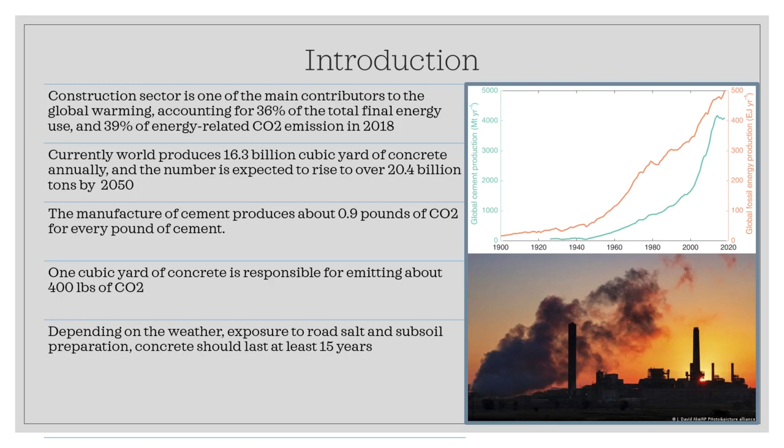Depending on the weather, exposure to road salt, and subsoil preparation, concrete should last at least 15 years. But of course, that can go up to 30 years if the concrete is properly designed.

Around 1 billion used tires are disposed of each year in the world. Only about 100 million tires are recycled. Since tire incinerating can lead to dangerous fires, spills, and air pollution, reusing tires as tire rubber particles and fibers can reduce air pollution and the amount of municipal solid waste released into the landfill. The sample weighted average carbon emission for recycling scrap tires is 124 kilogram CO2 equivalent per ton sold.

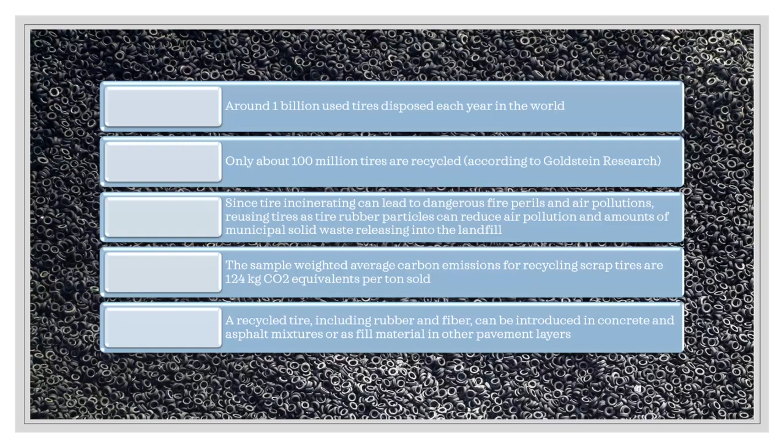A recycled tire, including rubber and fibers, can be introduced into concrete and asphalt mixtures or used as fill material in other pavement layers. In the 1950s, the concept of composite materials came into being, and fiber reinforced concrete was one of the topics of interest.

Once the health risks associated with asbestos were discovered, there was a need to find a replacement substance in concrete and other building materials. By the 1960s, steel, glass, and synthetic fibers were used in concrete. But research into new fiber reinforced concrete continues today.

Fibers are usually used in concrete to control cracking due to plastic shrinkage and drying shrinkage. They also reduce the permeability of concrete and thus reduce bleeding of water. Some types of fibers produce greater impact, abrasion, and shatter resistance in concrete. And larger steel or synthetic fibers can replace rebar or steel completely in certain situations.

Fiber reinforced concrete has all but completely replaced rebar in underground construction industries such as tunnel segments, where almost all tunnel linings are fiber reinforced in lieu of using rebar.

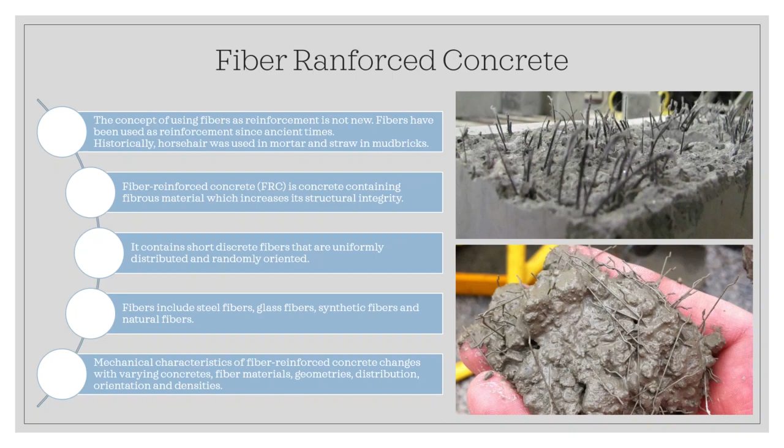Indeed, some fiber actually reduces the compressive strength of concrete. But of course, there are more benefits in other mechanical characteristics of the reinforced concrete materials.

The amount of fiber added to the concrete mix is expressed as a percentage of the total volume of the composite, termed volume fraction, or VF (V sub F), typically ranging from 0.1 to 3%. The aspect ratio, L over D, or length over diameter of the fibers, is calculated by dividing fiber length by its diameter.

Fibers with a non-circular cross-section use an equivalent diameter for the calculation of aspect ratio. If the fiber's modulus of elasticity is higher than the matrix, or concrete, or mortar binder, they help to carry the load by increasing the tensile strength of the material.

Increasing the aspect ratio of a fiber usually augments the flexural strength and toughness of the matrix. Longer length results in better matrix bonding inside the concrete, and finer diameter increases the count of the fibers.

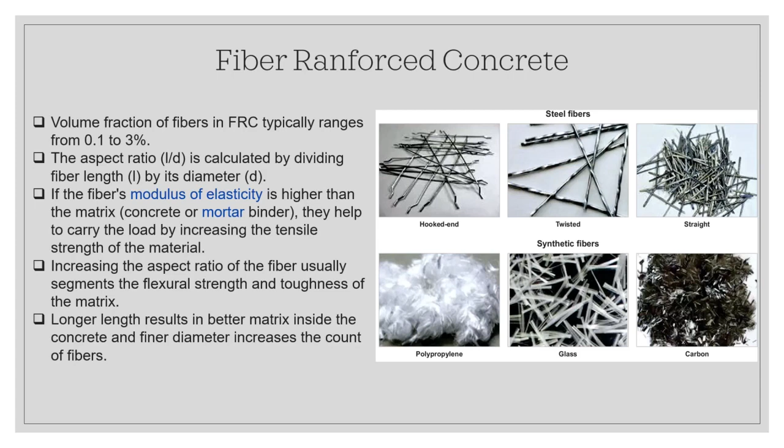One of the main applications of fiber reinforced concrete is pavement. As you know, we have two different types of pavement, flexible and rigid pavement. In flexible pavement, we usually use asphalt material, and in rigid pavement, we use concrete material.

The essential difference between the two types of pavement, flexible and rigid, is the manner in which they distribute the load over the subgrade. Rigid pavement, because of concrete's rigidity and stiffness, tends to distribute the load over a relatively wide area of subgrade. The concrete slab itself supplies a major portion of the rigid pavement's structural capacity. Flexible pavement, inherently built with weaker and less stiff material, does not spread load as well as concrete.

Flexible pavement usually requires more layers and greater thickness for optimally transmitting load to the subgrade. The major factor considered in the design of rigid pavement is the structural strength of the concrete, so minor variations in subgrade strength have little influence upon its structural capacity. The major factor in flexible pavement design is the combined strength of the layers.

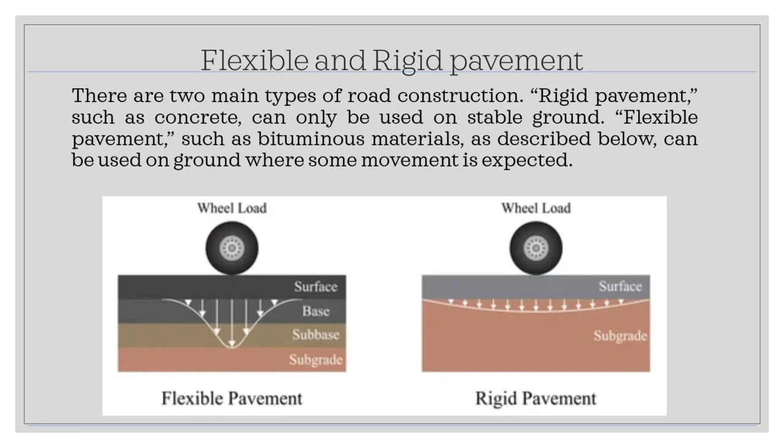Developing cracks in concrete pavement is one of the major problems that can cause defects and failures. There are many different types, including the plastic shrinkage crack: when concrete is still in its plastic state before hardening, it is full of water. When the water eventually leaves the slab, it leaves behind large voids between the solid particles. These empty spaces make the concrete weaker and more prone to cracking. This happens frequently and is referred to as plastic shrinkage cracking.

While plastic shrinkage cracks can happen anywhere in a slab, wall, or other concrete structure, they almost always happen at reentrant corners or around a circular object in the middle of a slab. So wherever you have utilities, pipes, or drainage, it's more prone to cracking there. Since the concrete cannot shrink around the corner, stress will cause the concrete to crack from that point. The other type of crack is the expansion crack.

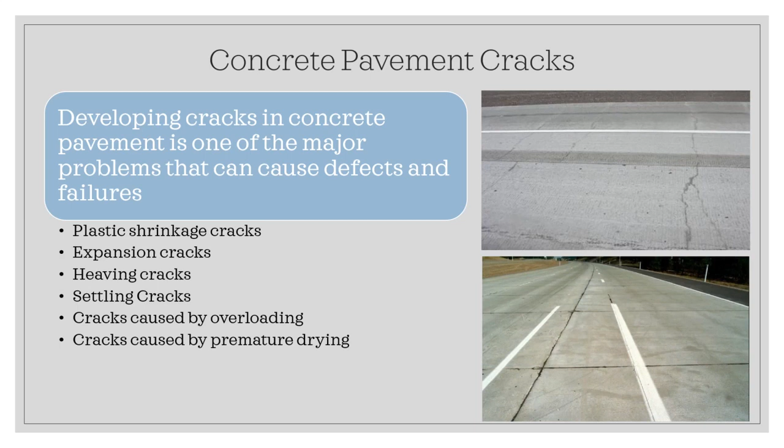Now let's talk about recycled steel fiber. In recent years, several research studies have explored the potential of end-of-life tire byproducts in the construction industry. The reuse and rational disposal of ELT is a high priority goal of the tire business, since the increasing amount of this waste is a serious environmental and public health threat. The reuse of waste tires has become the most sustainable strategy to enable investment in ELT recycling.

Approximately 15 to 25% by weight of a tire is composed of metal, which is great—we can basically use this 15 to 25% in concrete as recycled steel fiber. Recycled steel fiber is currently derived from the tire recycling industry using mechanical and thermal degradation processes such as tire shredding, cryogenic reduction, and pyrolysis.

Use of recycled steel fiber may reduce CO2 emissions since recycling saves an impressive amount of energy, contributing to the reduction of the ecological footprint and promoting environmental sustainability. The reinforcement of cement-based material with discrete steel fiber is now a current practice for several applications such as industrial floors, tunnel lining, prefabricated elements, and hydraulic structures.

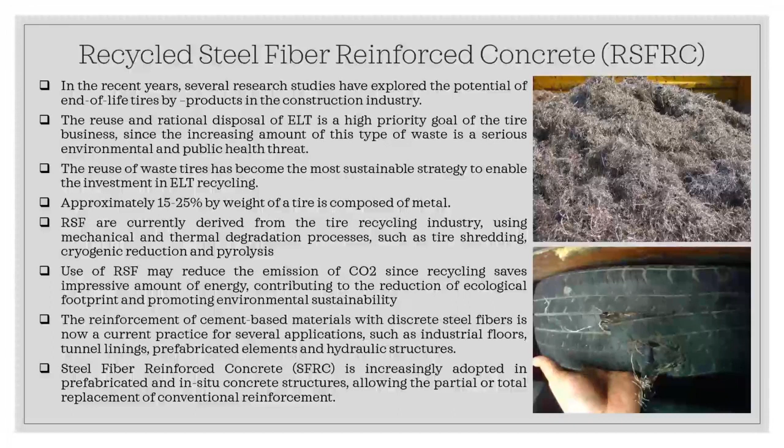Steel fiber reinforced concrete, or SFRC, is increasingly adopted in prefabricated and in-situ concrete structures, allowing the partial or total replacement of conventional reinforcement. The incorporation of industrial steel fibers, ISF, in reinforced concrete to improve the mechanical and durability performance of concrete structures has been investigated over the past three decades.

The crack opening restraint provided by the reinforcement mechanism of ISF bridging the cracks leads to a significant increase in post-cracking load bearing capacity and energy absorption performance, resulting in increased strength, ductility, and toughness. The stress redistribution provided by fiber reinforcement allows the ultimate load to be higher than the cracking load, which is notably significant for structures with a high degree of support redundancy.

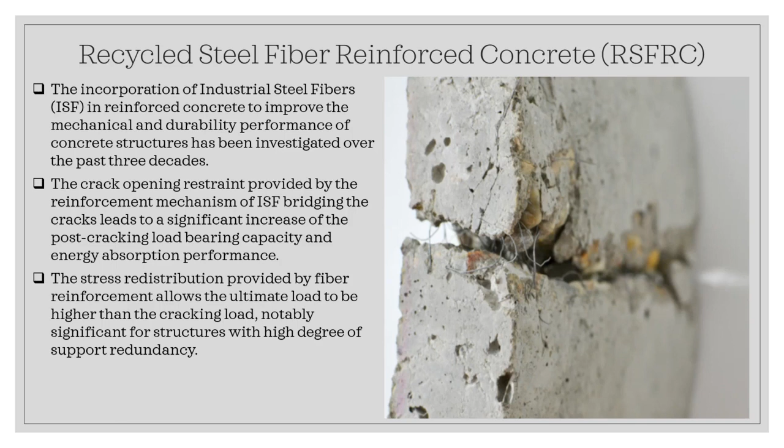Recent research demonstrates that RSF can be a viable alternative to commercially available ISF for use in steel fiber reinforced concrete without a significant decay in the relevant mechanical properties, provided that RSF present adequate geometric characteristics, which depends on the source, which is waste tire, and the recycling process.

In this process, basically, depending on the type of waste tire, the fibers or wires inside may have different grades of steel, and depending on the manufacturer, they may have different mechanical characteristics. In addition, the recycling process may change the property of the fibers, especially in terms of aspect ratio.

The results of experimental and numerical investigations aiming to characterize the tensile and bond behavior of RSF embedded in a cementitious matrix, as well as the compressive strength and flexural behavior of notched recycled steel fiber reinforced concrete beams, show that recycled steel fiber may be suitable for reinforcement of cementitious composites with enhanced ductility and toughness properties. In addition, the replacement of ISF by RSF in fiber reinforced concrete responds to the concept of circular economy, as it may impact the reduction of energy consumption and greenhouse gas emissions.

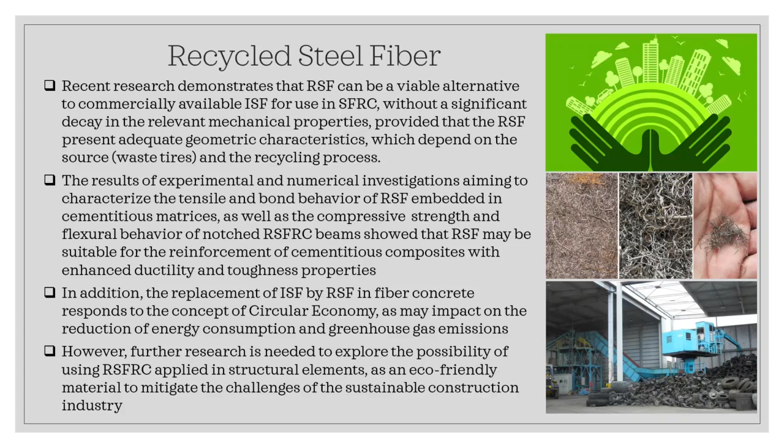Constitutive models describe the material responses to different mechanical conditions, which provides stress-strain relations to formulate the governing equations. As we all know, steel is an isotropic material that provides identical strength in compression and tension, of course, at the material level.

When you look at the stress-strain relation of concrete material, typically concrete is very strong in compression as compared to tension. According to ACI, the modulus of rupture, which can be considered as tensile strength, is considered as 7.5 lambda squared root of FC prime in US units.

Most of these empirical equations provided in standards consider the tensile strength as a function of compressive strength, meaning that by increasing the compressive strength, you can expect that the tensile strength is also increased.

But as I said, in concrete material, you cannot use concrete in tension without reinforcing it when you want to use it as a structural member. So either with a steel bar, composite materials, or even fibers, you need to reinforce the concrete wherever you have tension, either pure tension, which is very rare, or flexure, where part of the section is taken into tension.

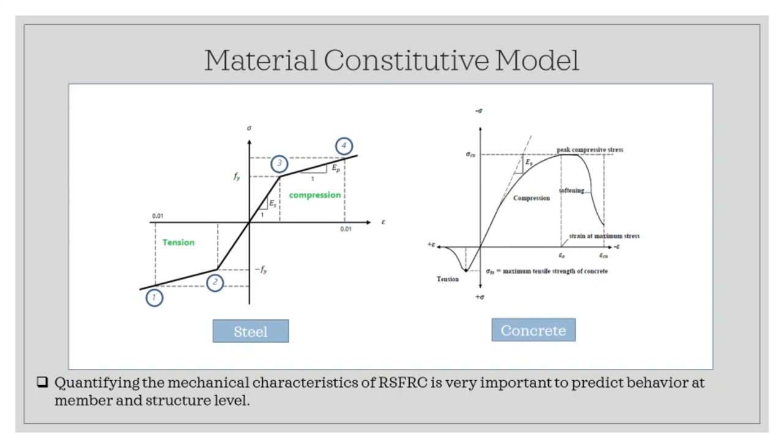When it comes to recycled steel fiber reinforced concrete, it is even more complicated. The reason is because in recycled steel fiber reinforced concrete, the shape of the fibers are not identical. We have different shapes and also different aspect ratios that we need to take into account when using finite element methods or computational simulation to analyze our structure or structural member.

One of the most recent research conducted on constitutive models for SFRC is the research conducted by Yang et al. in 2019, and they provided tensile strength, elastic modulus, Poisson ratio, and also the compressive strength of fiber reinforced concrete.

In this research, what they did was use a factor called RI, or reinforcement index. The reinforcement index in their research is simply defined as the multiplication of volume fraction by aspect ratio. So that basically means the fiber content multiplied by aspect ratio, which aspect ratio is the length of the fibers divided by diameter of the fibers.

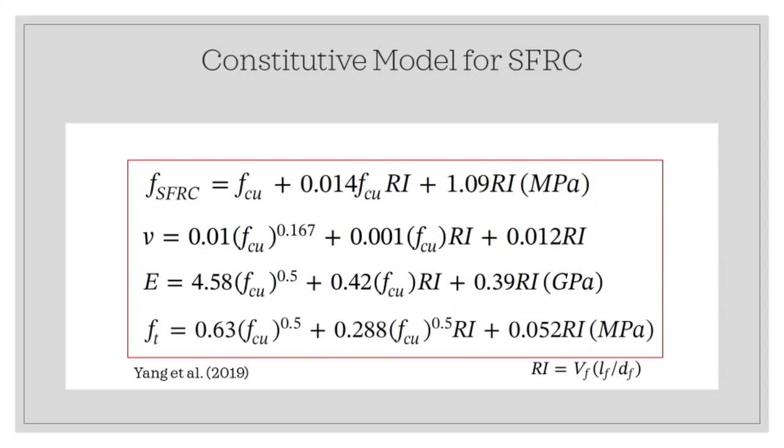So with two parameters, one is RI, the reinforcement index, and the other is FCU, which is the compressive strength of the concrete used in making that fiber reinforced concrete material, this concept can also be used in identifying the recycled steel fiber reinforced concrete mechanical properties and constitutive model. Their research was based on experimental and numerical results used to come up with this constitutive model. Geometric characteristic of fibers is a main difference between recycled steel fibers and industrial steel fibers.

A group of students from Morgan State University, from my research group, conducted research on recycled steel fibers extracted from tires. They visited a couple of recycling plants and collected some of the wires and steel fibers extracted from waste tires, brought those to the lab, randomly selected different batches from these different recycling plants, and then characterized the geometry of the fibers in terms of length and diameter, then determined aspect ratio, and also tried to see the frequency of these fibers within a batch.

This is important because, as shown in a previous slide, there is a relationship between the reinforcement index and the tensile strength, compressive strength, elastic modulus, and so on. So by increasing the reinforcement index, you can increase the strength in tension, compression, and so on, definitely enhancing the mechanical properties of the material.

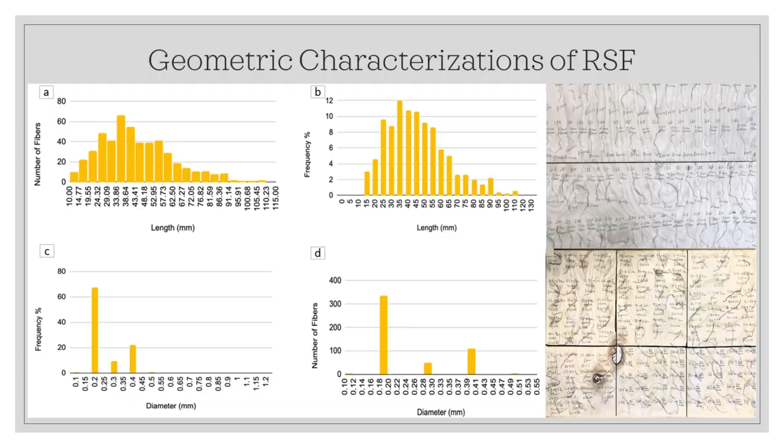Now let's talk about the computational modeling. An experimentally verified numerical model was used in this study to evaluate the performance of a flexural member made of fiber reinforced concrete, to conduct a parametric study evaluating the performance of recycled steel fiber reinforced concrete. ATENA was used in this research to conduct finite element analysis, a nonlinear crack analysis for concrete and fiber reinforced concrete for a flexural member.

ATENA belongs to a category of advanced analysis software such as ABAQUS or ANSYS, but it specifically focuses on reinforced concrete structures and brittle material. ATENA is especially designed for concrete, and the main advantage is that even though the analysis describes severe cracking, the program never fails finding a convergence solution. This is one of the problems that in many of these software, like even ANSYS, we really have a problem with crack analysis, because the convergence of the model sometimes becomes very difficult.

As mentioned, in this study we conducted a verification with experimental results, and a very close agreement was achieved between the result of the finite element model and experimental results. I forgot to mention that this software, ATENA, is capable of performing modeling of high temperature and fire loading on concrete structures. Also, modeling of structural durability and reinforcement corrosion, which is quite interesting.

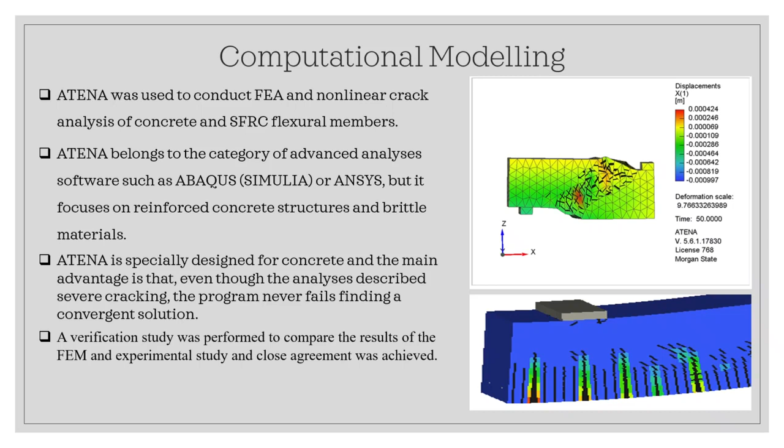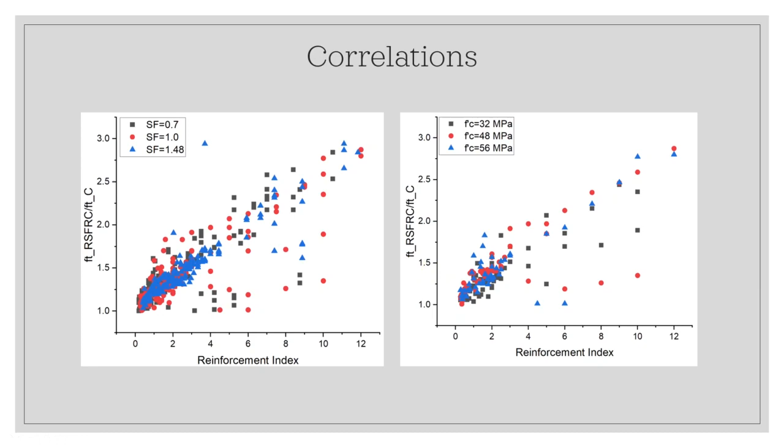But as you see, by increasing the reinforcement index, most of the cases independent of the shape factors or the compressive strength. You see a significant increase by increasing the reinforcement index on this ratio, which is the ratio between the tensile strength of recycled steel fiber reinforced concrete over tensile strength of concrete.

After that, as part of that result, which is still ongoing, these are showing some prediction models that were conducted based on the reinforcement index, FC prime, and the ratio between tensile strength of recycled steel fiber reinforced concrete over tensile strength of concrete. This model, which is based on surface fitting, is what was extracted from this research — meaning that by knowing the compressive strength of concrete and using the reinforcement index as defined, you can predict the tensile strength of recycled steel fiber reinforced concrete.

So this could help us design a member based on this tensile strength and see how much additional reinforcement is required. One thing I need to mention here is that, since this research is still ongoing, RI — the reinforcement index — was defined here as a multiplication of shape factor by volume fraction by aspect ratio.

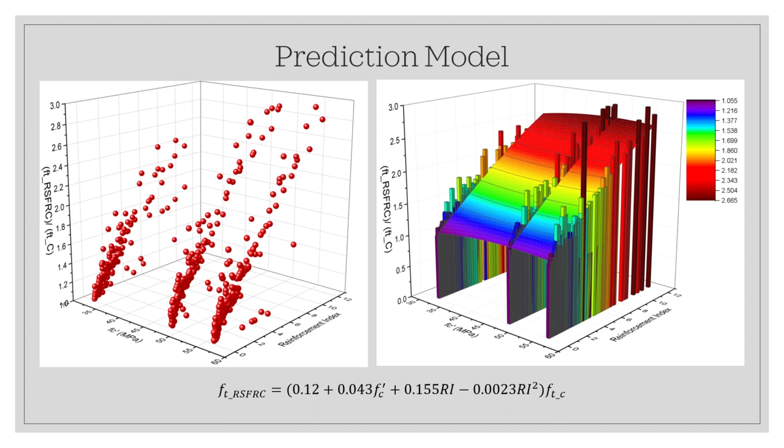Now let's talk about the conclusions. First of all, replacing industrial steel fiber with recycled steel fiber to reinforce concrete structures has many environmental benefits and can reduce the amount of CO2 emissions, of course.

Aspect ratio, fiber content, fiber shape factor, and concrete compressive strength are the main parameters in flexural and tensile strength of recycled steel fiber reinforced concrete members. Orientation, distribution, and density of fibers can significantly impact recycled steel fiber reinforced concrete mechanical characteristics. This was shown by a few experimental studies that we did in our lab, and also many previous studies conducted before.

Geometric characteristics of recycled steel fiber need to be analyzed in order to predict the bending strength at the member level. Why? Because aspect ratio is one of the major parameters in changing the reinforcement index.

The reinforcement index that was previously introduced for fiber reinforced concrete needs to be revised for recycled steel fiber reinforced concrete. So we incorporated the shape factor, but of course the weight of each parameter needs to be included in terms of how much effect each one has on increasing the load-bearing capacity of a member, or increasing the tensile strength of a member subjected to flexure or tension.